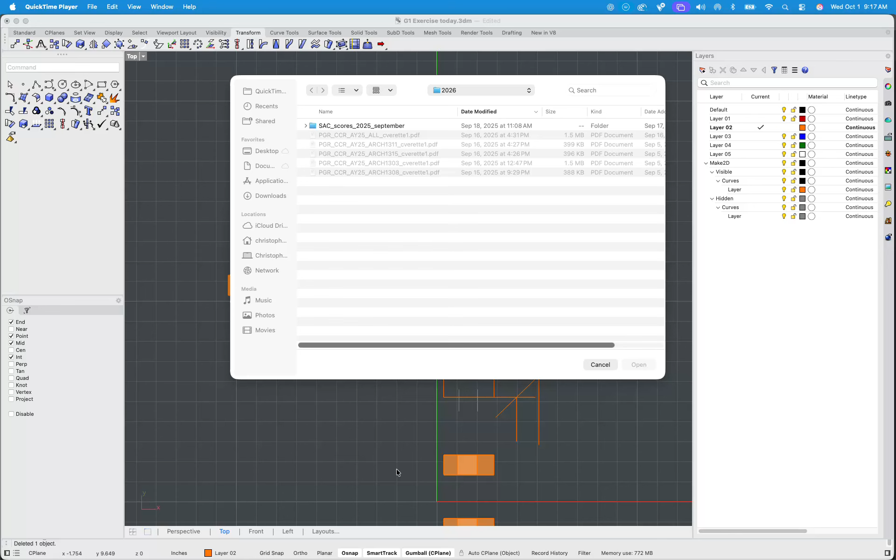Absolutely. Yeah, so a couple of things. You guys are basically drawing 1-to-1 and then kind of in a scaled version, right? Is that kind of what y'all are doing? Is it supposed to be a certain scale, or is it going to be a certain size, but then translates to that scale?

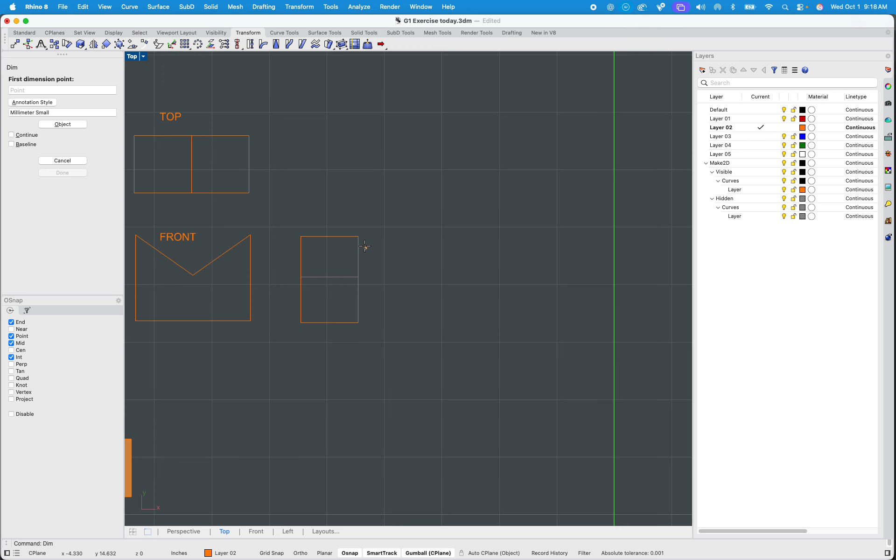So relatively speaking, I didn't get to show you guys this last time, but DIM, dim, as in dim the lights, as in dimension. If you hit dimension, you can actually click on 2 points. In my case, mine will struggle, but you can click on 2 points and get a measurement from it.

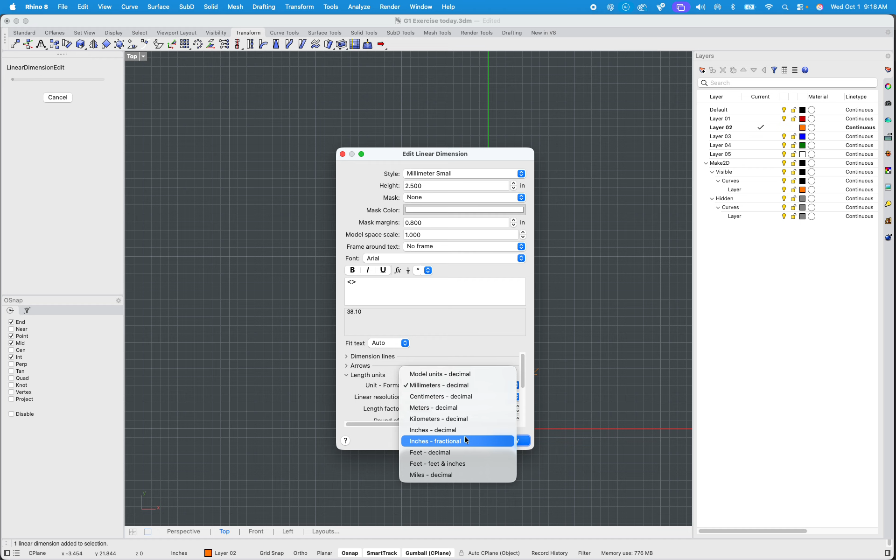If you double click on that measurement, because right now 38.10 millimeters is definitely not inches, you'll see you have different styles. If you go down to alternate units, or even just length units, we can switch it from millimeters decimal to inches fractional. We'll press apply, and voila, 1.5 inches. Definitely a little bit more useful.

Also, at the same time, it's really, really big. So another thing we can do is say like 0.5, and make that a little bit smaller. The arrows are still very big, so you might have to double click on these a couple of different times and actually scale down some things. Dimension lines can be changed, just like arrows can be changed. You can really change a lot of different things here. Let's go with like a 0.5 there.

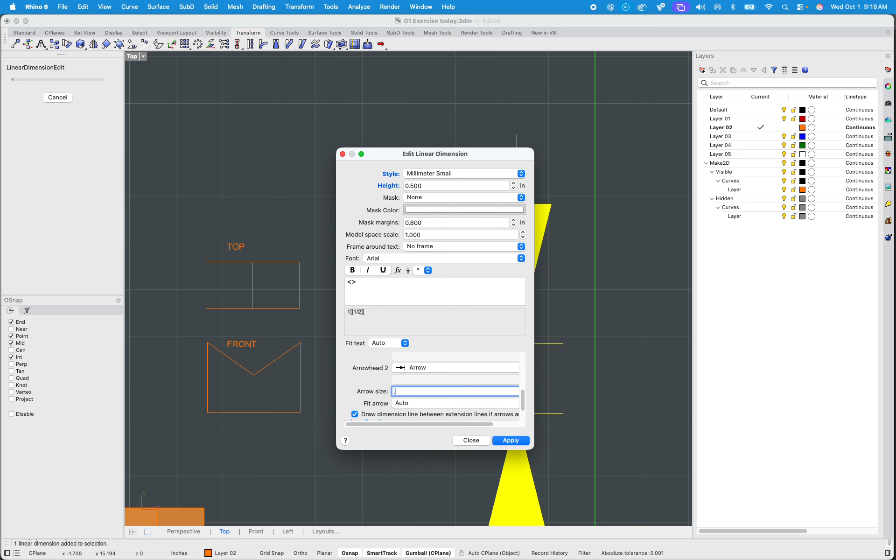As you can see, we can really get this down without having to necessarily draw arrows and draw dimension lines. Don't get me wrong, back in the day, that's what I used to do - I would literally just draw it and type it in. Now it's actually all automatic through a command, so that definitely makes our life a little bit easier.

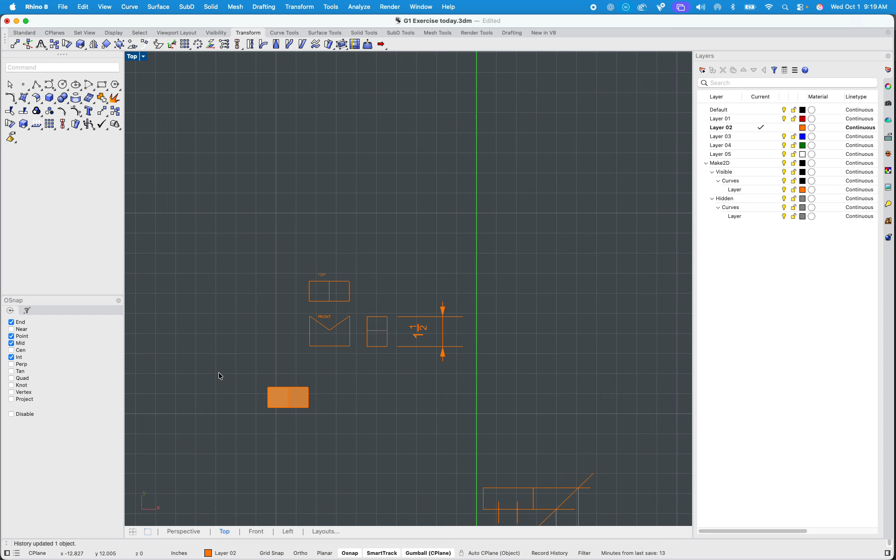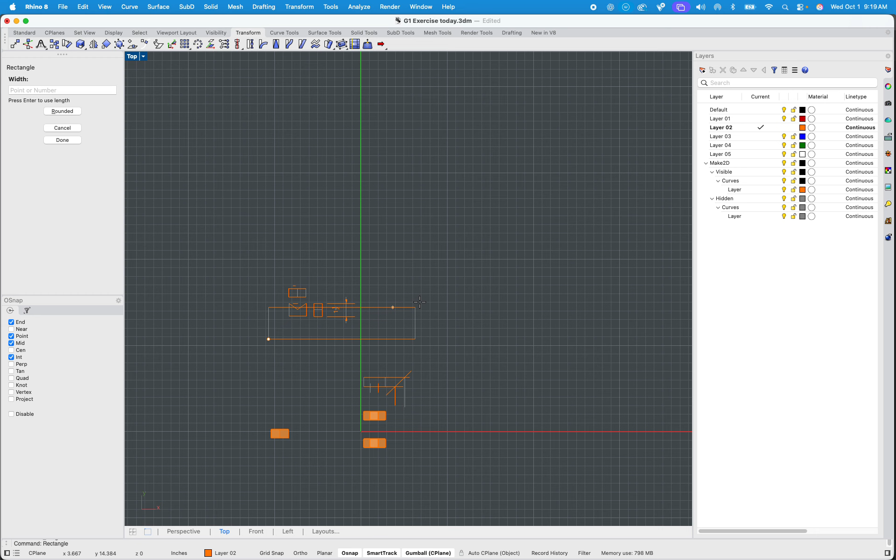However, if we're trying to print, we do need to establish a certain scale. And from what I hear, it needs to go on 11 by 17. So I'm going to move my object out of the way and make a rectangle. I'll type rectangle, click my first base point, that's what it's going to ask for, and then I'll type in 17 inches for my X and 11 inches for the Y.

So 11 inches, and there's that 11 by 17, just like that. Some of you guys may have realized that the measurements you take, you can literally type that in as you're drawing a line, hit enter, and it'll make that dimension. Hopefully you're already on track. Now, I can't imagine that you have to do dimension lines, but if you want to double check those things, obviously you can - you don't necessarily need them.

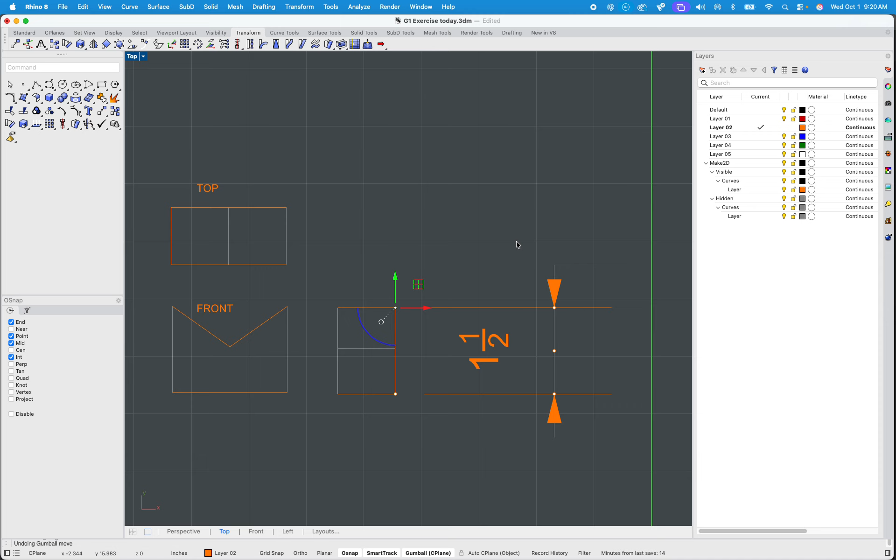Keep in mind, we can't really edit them either - as soon as we move this point, it really does change the dimension itself. If you did want to explode it and maybe change a layer or something like that, we can type in explode and turn it into its smallest parts. Basically what explode does is, no matter what you see, whether it's a block or a command, it essentially explodes it into its simplest parts.

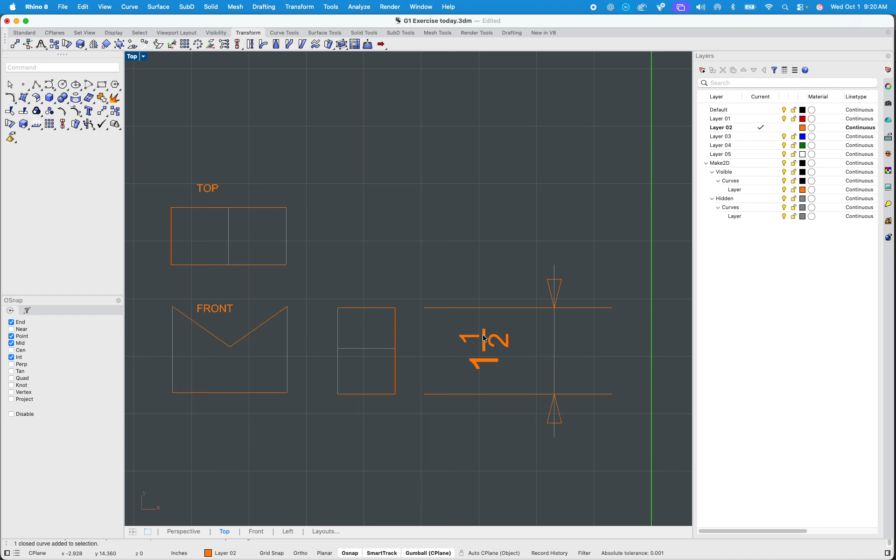And it says, are you sure you want to do that? Yeah, because you can't go back - you can't unexplode something. So once you explode it, it's done. However, it does allow some things - if I wanted to change any of these pieces, I could still, but I couldn't do that in the dimension line.

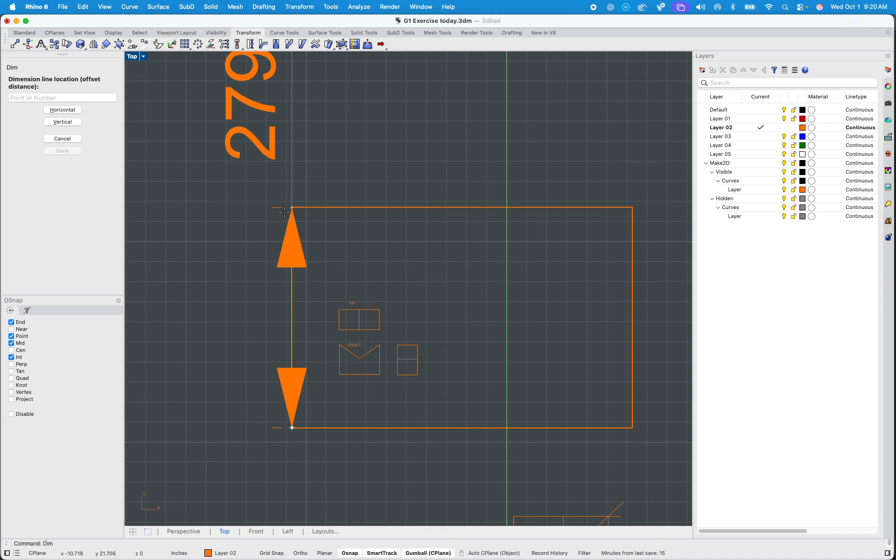So again, I'm still teaching the interface and still teaching some of these things. So we have our 11 by 17 - we can check that as well. So dimension - keep in mind, I don't think dimension applies to every dimension, so it might be something you want to do all together once you have all your dimensions.

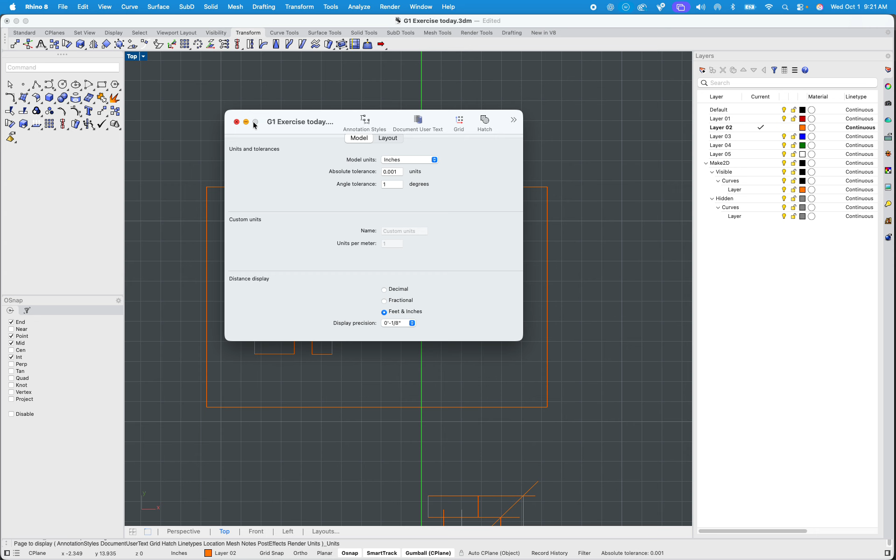Double click on them, and of course change that to the dimension style as needed. But again, I just kind of use it for reference anyway. Keep in mind, it is based on your units, so when you type in units, make sure that you're on inches, because we need that to be exactly 11 by 17. So that's pretty good. And let's say I was done there - I don't know, maybe I want a perspective as well.

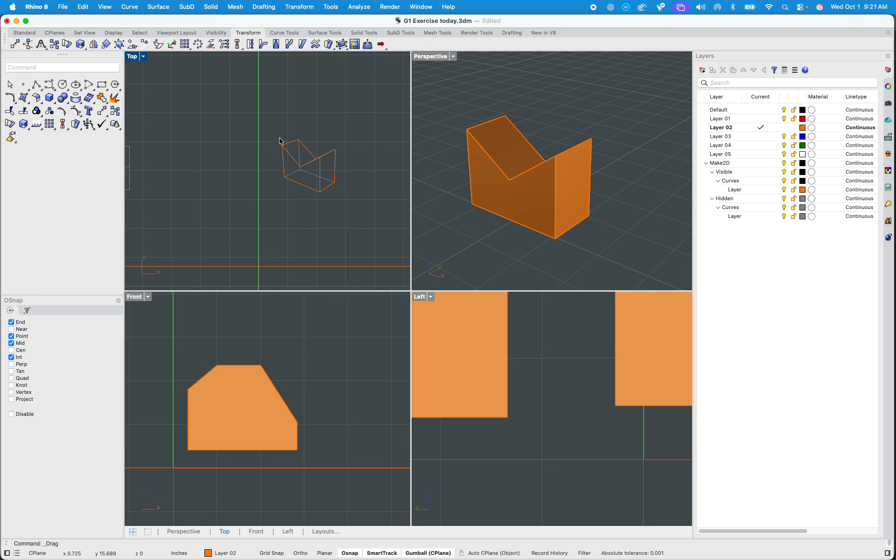I don't think a perspective is part of y'all's project, but say it was for studio. I could take that exact view, Make2D, get some hidden lines, press apply, and instantly take that piece and apply it. We can get that object. I can even make it bigger for dramatic effect or visual hierarchy.

This is where I would also draw maybe my title block. So some things that I didn't really get to go over last time are some of the two-dimensional operations we can do, such as offset. We can offset lines.

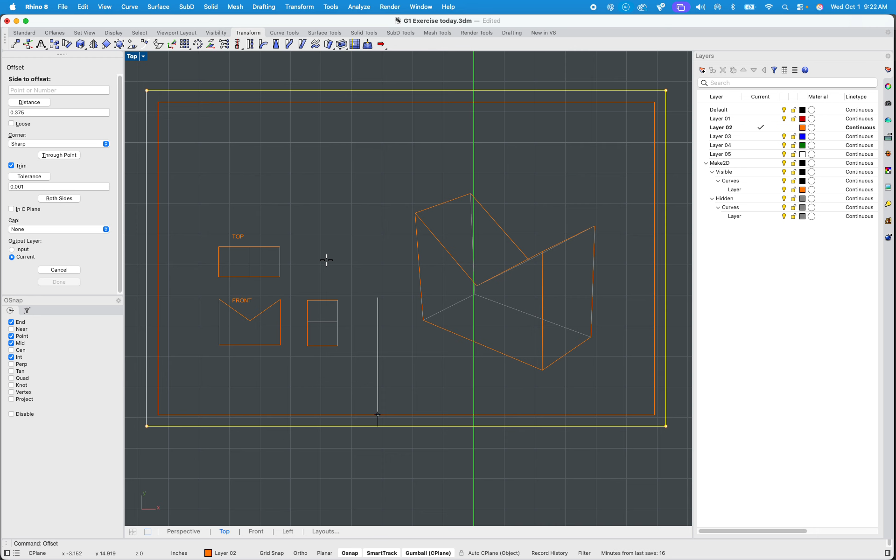How big is your title block usually? 3/8 of an inch. I can get that border. Let's say it was another inch inside, I can definitely do those things. Now it got all three of them.

I might need to explode and break it down to its smallest parts, and you'll see it's broken down to some of the lines that I don't need. So let's say I got rid of those.

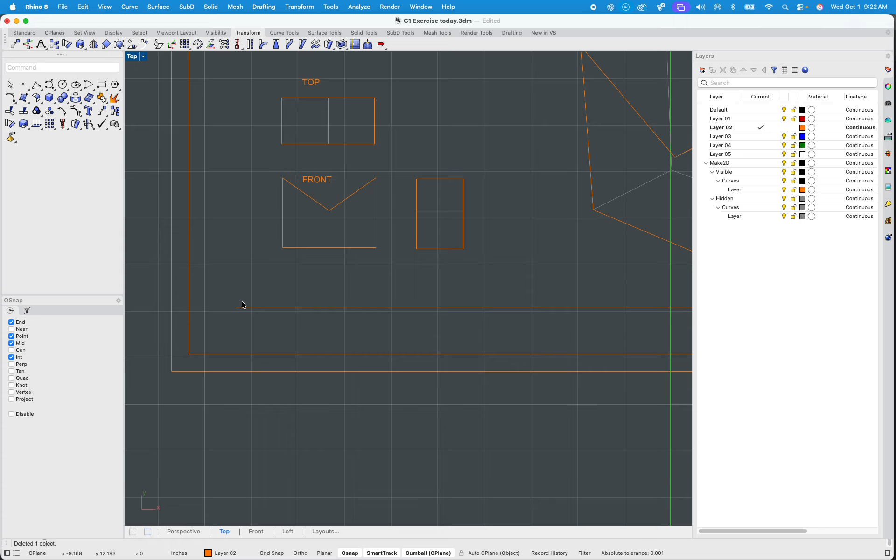Maybe I wanted to extend this line actually further out. Don't get me wrong, sometimes there's like 15 different ways to do the exact same thing. Sometimes I'll just gumball it and trim it. I'll take everything, trim, and obviously trim the excess of what I don't need.

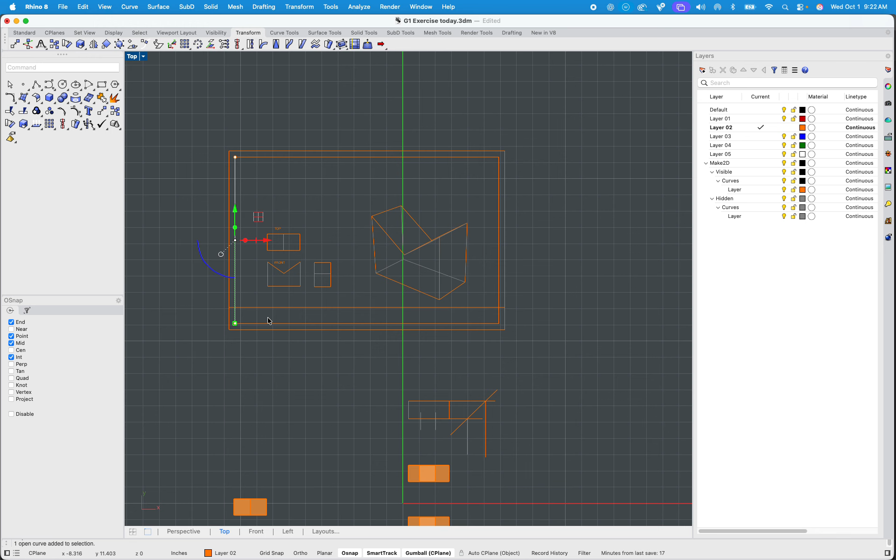Maybe I take that off as well, or I just need it as my boundary. So again, I'll take everything, trim, and trim off what I don't need.

Making some sense, right? I could draw another line, or I could just copy that line and realize, well, I needed it 1 inch away, so I'll type in 1 inch, and it's going to put that inch there for me. I can hold shift and keep it orthogonal if I need to.

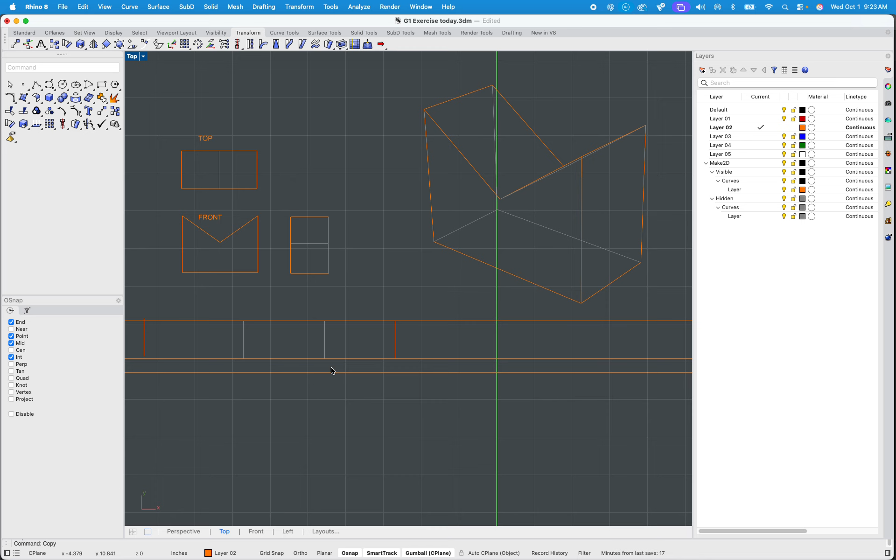It's a game changer. I mean, simply just copy the line. Why not? We already have that measurement, so we might as well take it.

What I really appreciate about digital programs is the ability to move things. Allow yourself to position those things a little bit more advanced, and maybe this is just me—I like to put in my construction lines.

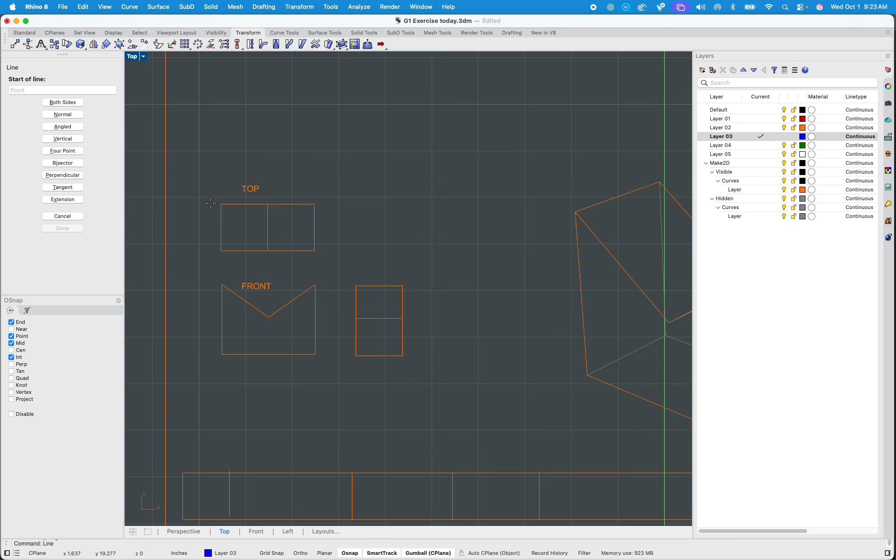Very often what I teach in computer graphics is actually to kind of fake it a little bit, and as you can see, my snap has stopped working. But very often I actually put in my construction lines, and I know that sounds kind of funny, especially in a digital world.

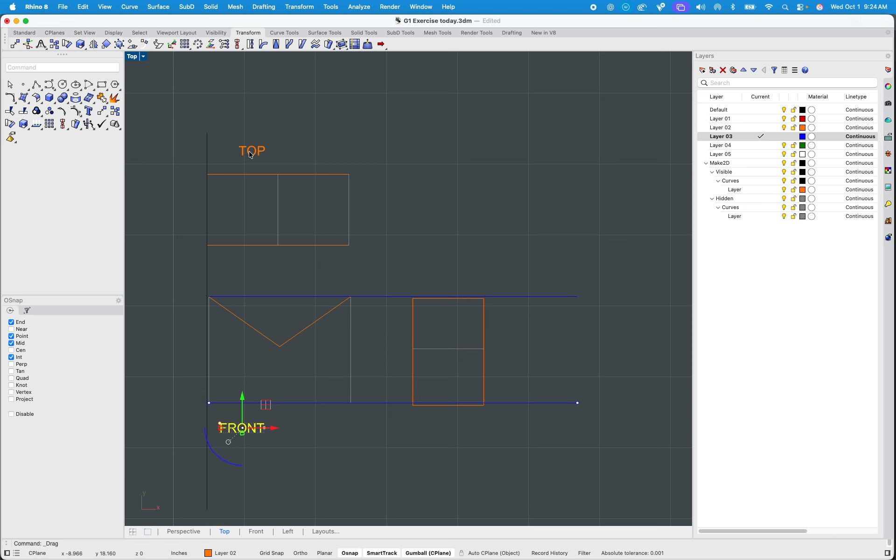Very often I bring up Toy Story 4. The reason why it's so much better is actually because it has more errors than Toy Story 1. It's the errors in life that actually make perfection, or really make our mind realize that something is maybe perfect versus not perfect.

However, let's say I was finished. I got my 11x17, I got my title block, I've got all my positions, and I even have some separate layers so that I can make some construction lines.

Keep in mind, they don't work the same way as in drafting. Obviously, we make the construction lines first, whereas in the digital realm, I apply them second to add weathering, if you will. And that's critical.

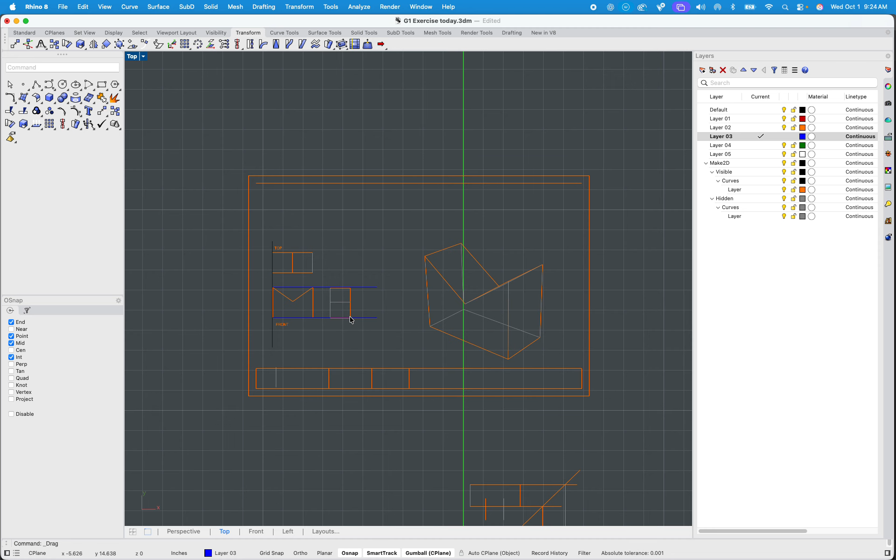Because in real life, I'll use an electrical plan as an example. An electrician gets a set of electrical plans, and you want a certain light in a certain place, at a midpoint of a room or 1/3 of the room, whatever. We show construction lines on those drawings too, just so the installer can say, oh, he wants this light exactly in the middle of this room.

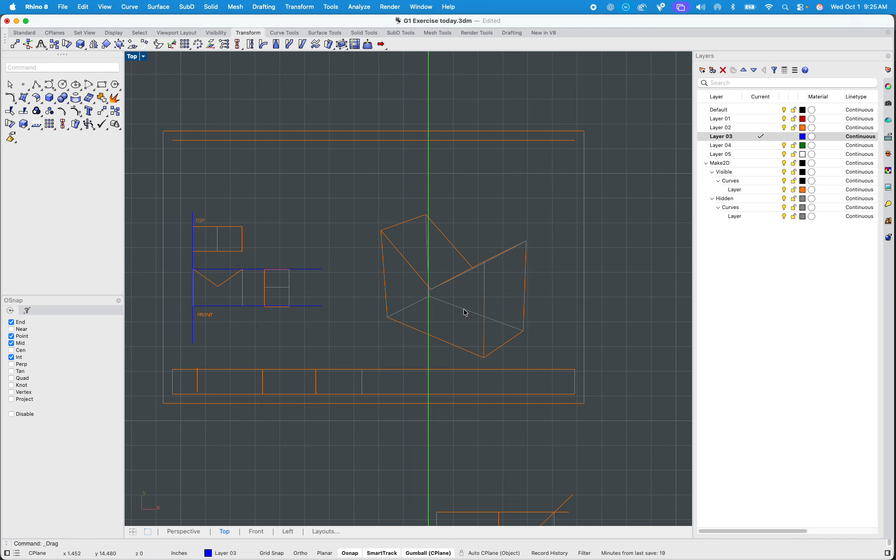Because sometimes what you draw is not what was built, and it's off by a little bit. So instead of putting a dimension, you put a line, say midpoint of the room, and it's really helpful.

Absolutely, yeah, because especially if I wanted to do that, I would probably give myself a midpoint line. Oh boy, I'm finding out that even my drawing's a little off. So again, I might want to actually check those things.

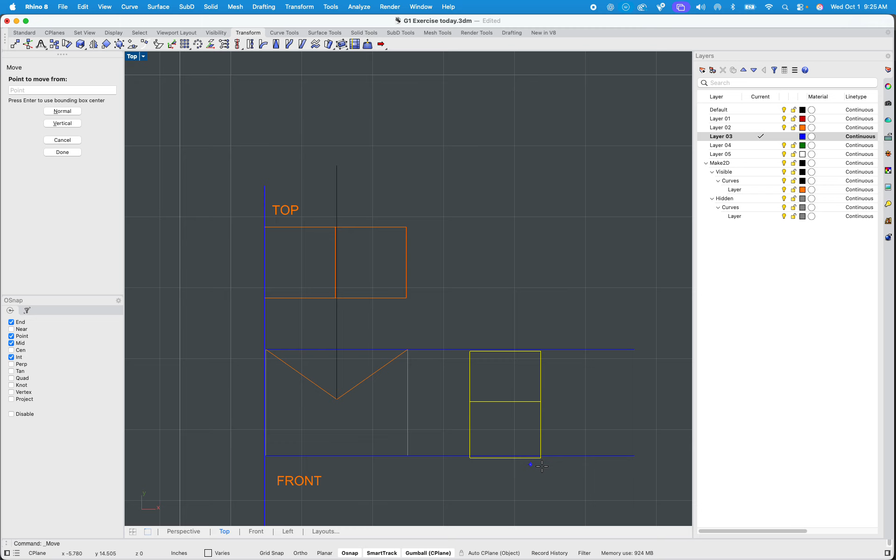Now, honestly, I can't remember how I made this last time, but that's okay. I can still fix some things though. If I move them, and of course still move that up, and hit those lines and things like that. I can also push my layer towards the back.

And it's not necessarily going to do anything here, but it definitely will do something in Illustrator, which is the next program we'll be jumping to.

A couple more things, just in case you run into this. If you want to extend a line, I know it's super intuitive. You actually click the line that you want to extend, type extend, and then select the line that you want to extend to. That could be a game changer if you don't want to just keep extending lines and trimming them.

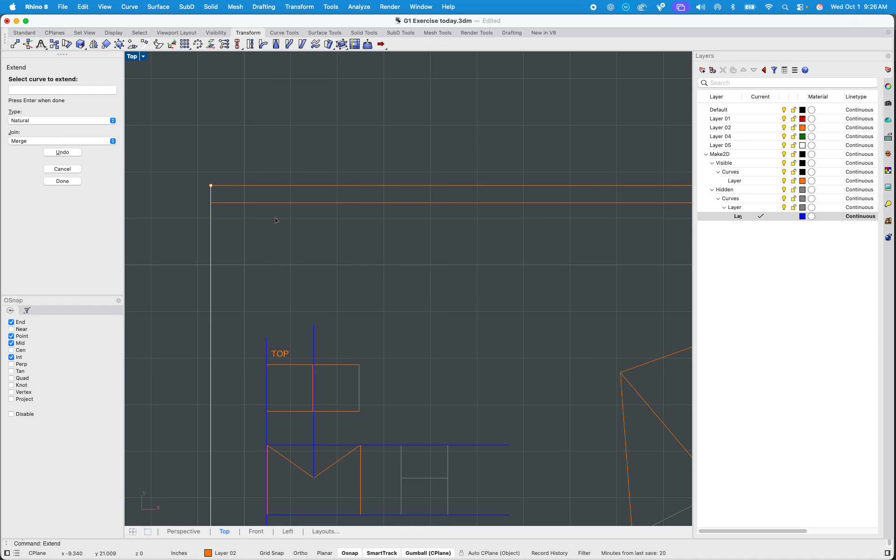I'm a fan of just trimming things because that's just the way I learned. In my case, I don't really need that line, but I do have my 11x17 and my pieces, and to be fair, I'm going to actually do my text in Illustrator because it looks better anyway. But maybe I needed a second line, so I'm going to take that line, hit the midpoint, and get some of those things. I may want to trim them up, so trim, right?

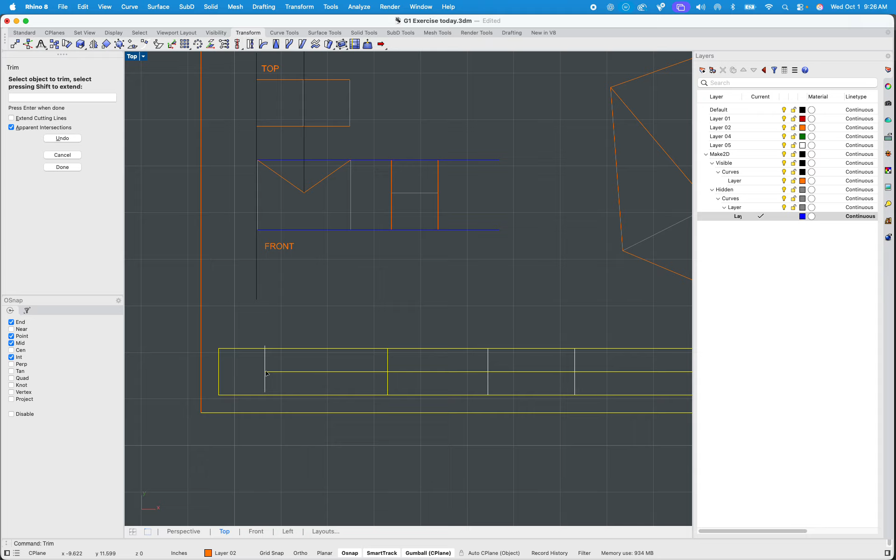Maybe I actually want to keep this for my logo or something, maybe the top. Again, we can obviously make some isolated boxes and trim as necessary. But the really important part is to get it into Illustrator, super easy. We'll take the entire thing.

Awesome, we'll go to File, Export Selected, and we'll turn it into a DWG. To be fair, there is an Adobe Illustrator file option, but it doesn't always work. I would say go to a DWG, it's a little bit more universal. So DWG, AutoCAD file, that is an AutoCAD file.

I'm just going to save it to my desktop for ease, and we'll call it G1 Illustrator. It's going to bring up a message asking how you want to save it. Just choose the youngest or the earliest year in lines, right?

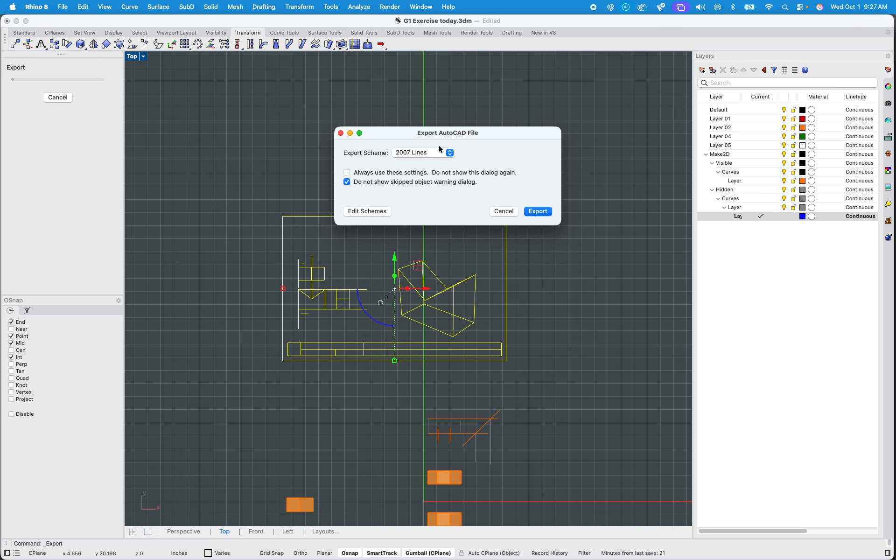So you'll see there's a lot of options here. Obviously, we're not working with polylines or solids, we want to choose 2007 lines. If that's not available, CAM Imperial is also fine. Why Imperial? Because we want it to stay in inches.

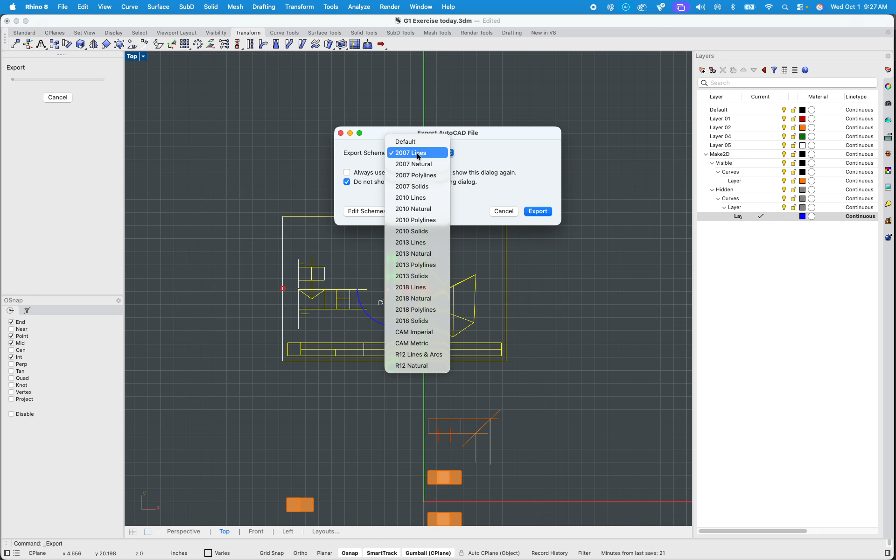We don't want it to necessarily go into millimeters again. So you can choose CAM Imperial or even just 2007 lines. I'll press export, and that's it, right?

From here, we'll go to Adobe Illustrator. We'll go to Open, and we'll open up that DWG. So in my case, I'll open up my G1 Illustrator DWG.

In my case, I'm not scaling anything here. The way that I drew the lines in Rhino, I drew them at an exact length, at exact inches. So I want to maintain that and just say original size. In my case, 1 unit equals 1 inch. Sweet, press OK.

So let me open it up wrong to kind of show you what I mean. So I'm going to go ahead and do that again.

Another thing that's kind of cool about this is, well, if I did need to scale it to something, I could say scale by, right? And well, if I want 1 inch to equal something else, I could, right? So for instance, I could use 0.125, which would be 1/8 inch. So I can say every inch now equals 1/8 inch.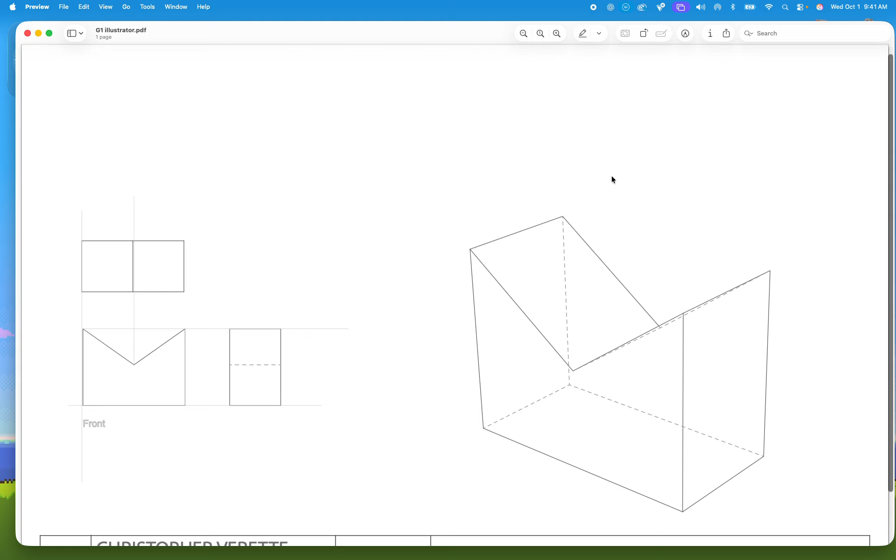So, you know, I kind of like to share my secrets of wealth, if you will. It's definitely worth looking at the aftermarket ink, and seeing that, wow, they actually make this aftermarket ink on Amazon, and well, I can get actually 4 packs of it for $18 instead of 1 pack of it for $65. In fact, by volume, ink is still the world's most expensive item. And they've definitely got us, because we either have to draft it and pay for the pencils, or we have to pay for the ink that goes onto the paper.

So, any questions so far about that process? Pretty simple, I think, not too shabby. Luckily it's all recorded, so you can actually step by step.

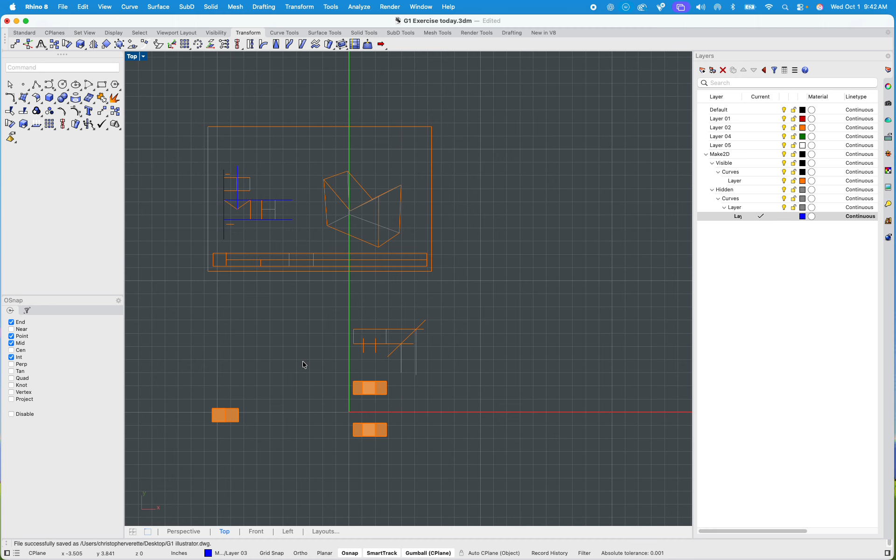Any questions about Rhino? Some things that you're running into, something that you're trying to do, and maybe there might be a better way. No questions? Fair enough. The mind's rolling, I'll just check back on the videos. Good, well, fair enough, I'll end it there for today.